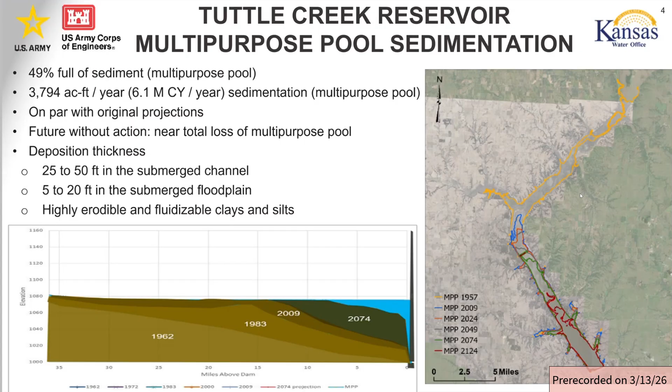And then you can also see a second way of displaying this, loss of the multi-purpose pool over the years, originally in 1957 when the reservoir was constructed. You can see the size of the multi-purpose pool at that time, and then just compare that over time to the different time frames where we either had a survey or we have projections. And then this red is what would be left of this total reservoir area multi-purpose pool, at least projected to be in 2124.

So to give a little bit of background on water injection dredging, or WID as it's known, it's an innovative type of dredging where the dredge injects large volumes of water at low pressure into the sediment bed in order to fluidize it. WID vessels are pretty simple compared to traditional dredges. They have two large pumps on the barge that pump the water from the surface down to the bed.

The dredge is positioned over an area to be dredged and then moves in one direction in order to fluidize the sediment. They don't typically require a lot of support equipment. They're easy to mobilize. They have low energy input compared to traditional dredges. And so WID has never been performed on a reservoir before.

So our WID vessel is unique compared to other vessels. A lot of WID operations occur in ports and harbors, primarily overseas. And so ours was constructed in the state of Kansas, and it was designed specifically for Tuttle Creek Lake.

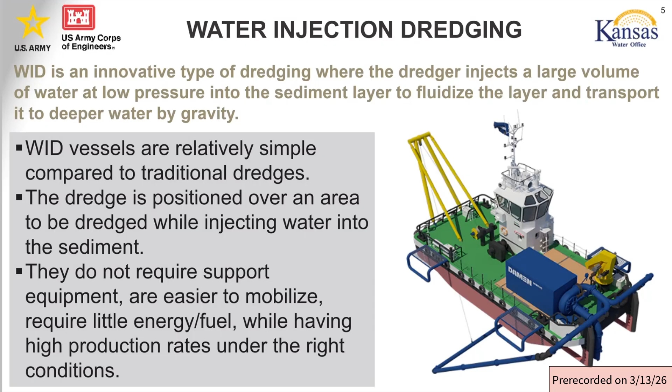So water injection dredging's goal is to create a density current. By pumping large volumes of water from the surface to the bed, it creates this density current, which is essentially a fluid mud layer that is denser than the surrounding water. And that density difference allows the density current to transport downslope, typically towards the gates. Once it reaches the gates, it would re-enter the natural environment of the Big Blue River.

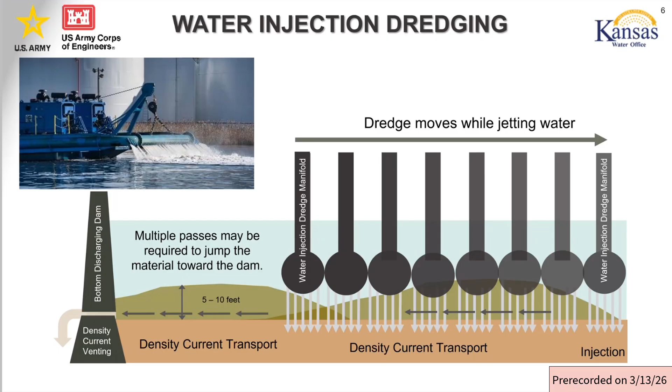As part of this project, we are trying to study the travel distance of this density current and other operational parameters so we can fine tune it and determine what the optimal dredging pattern could be.

So as we discussed in the past, the goal of this demonstration project is to answer questions, not to remove a certain amount of sediment. Again, because WID has never been performed on a reservoir, we need to answer these questions. Could it be an effective sediment management methodology in the future?

So here are some of the primary questions that we are trying to answer as part of this project. Really, how much sediment can WID remove? How much does it cost? And then what are the downstream impacts? Are there any downstream effects, both for water quality, ecologically, geomorphology? And if we can answer these questions, then we consider this a fully successful demonstration project.

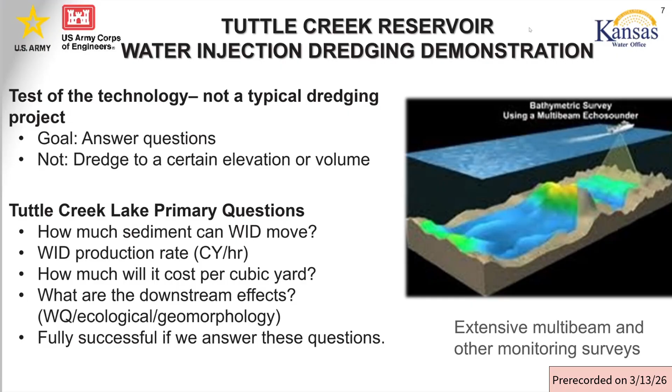In addition to the primary questions, there are also some secondary questions that we are working with several collaborators to answer. These secondary questions primarily relate to the sediment transport of the density current, some sediment consolidation, as well as some chemistry and ecological variables both in the lake and downstream as well.

Some of our collaborators include federal entities in the Engineer Research and Development Center, the USGS. We also have several state collaborators and several academic collaborators as well.

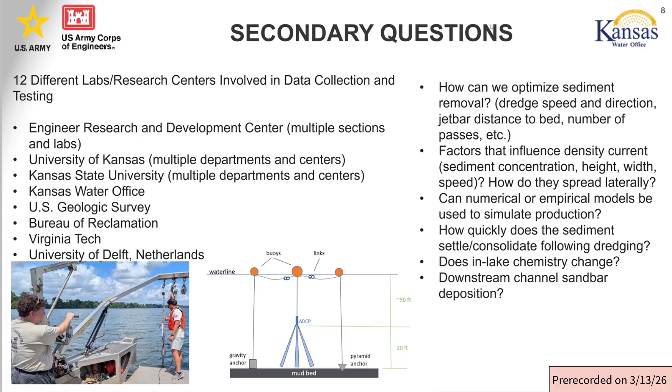Our implementation plan is to dredge, as Laura mentioned, for 200 hours in the fall, in the spring, and in the summer. The fall test occurred in September of 2025. As part of that, we really used it as a big science experiment to determine what the optimal dredge parameters should be. We tested parameters such as the dredge location, the speed, the direction, nozzle spacing, and we assessed the effects of all of these on the reservoir bed and also the water quality downstream.

And then from the lessons learned from the fall test, we are going to implement those lessons to the spring and the summer tests to optimize sediment removal while remaining within our permit restraints downstream.

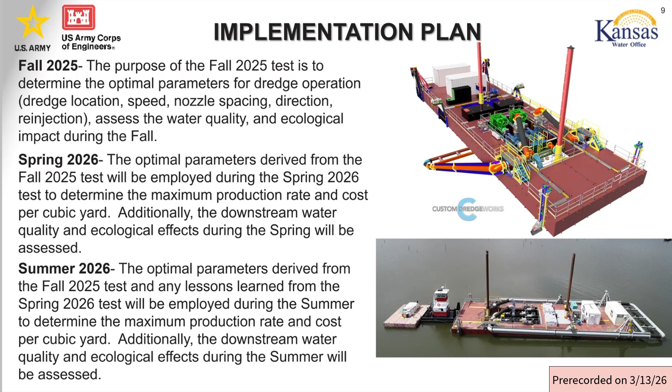The dredge operations will occur primarily closer to the dam, so within the first 4 miles from the dam will be the majority of the dredging. And then some of the further tests away may help answer some of the questions such as density current transport, what that transport distance should be. So we anticipate a little bit of dredging in the upper reservoir, but primarily focused in the lower 4 miles of the reservoir.

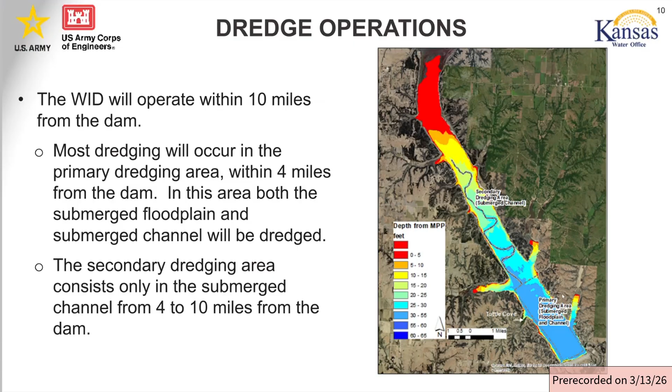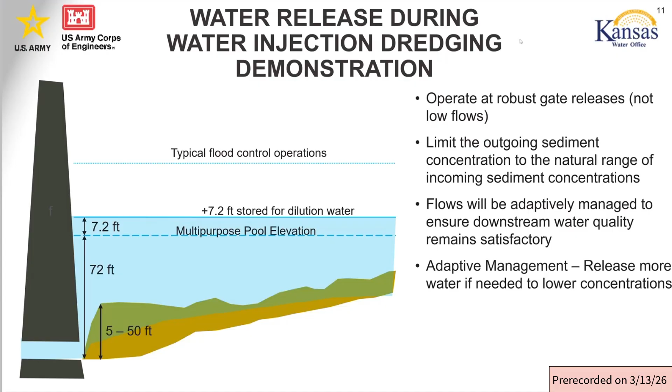The flows leaving the reservoir will be robust flows in order to ensure that the flows are able to transport the sediment that's leaving the dam. And those flows will be adaptively managed to ensure that we limit the concentration in the downstream channel to the natural variability of what's coming into the reservoir. So our main goal is really that we manage the flows such that what's leaving the reservoir is similar to what's coming in as far as concentrations go.

Here's our downstream monitoring plan. We have 5 continuous gauge stations on the Big Blue and Kansas River, measuring real-time turbidity and water quality. And we are also monitoring at several locations for pre- and post-project water and sediment quality measurements. Some of these include bed elevations, bed gradations, invertebrates, and water quality parameters.

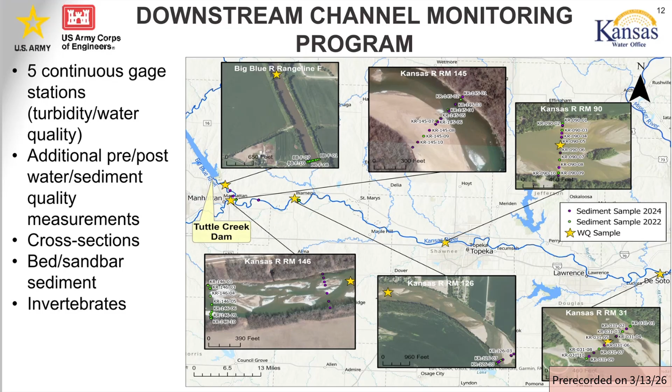As far as some of the preliminary conclusions that we've gleaned from the fall test, we did not exceed any of the state water quality criteria or the conditions of our 401 certification. Monitoring results for the fall test remain below the treatment triggers for Kansas River water plants, so no additional treatments were necessary. We are collaborating and planning for ongoing adaptive management technical teams to mitigate any potential impacts to aquatic life, so we are continuing to adaptively manage during the following demonstrations.

And then finally, the aquatic richness was lowest at the upstream control site 3 days and 4 weeks after the WID test. Downstream sites showed no apparent reduction in richness compared to the pre-test levels or to the control site.

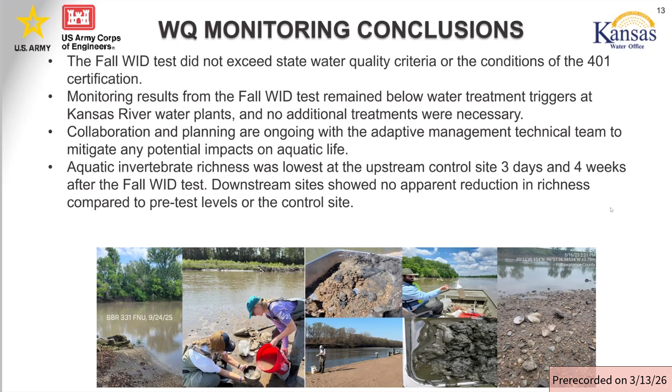Yeah, so I'm just going to provide a brief summary on the data assessment for all the information that we're collecting during these 3 dredging demonstration periods, and then how we're going to share that information internally and externally as well, and then our post-WID reporting. So one of the products from the demonstration will be a project technical report that'll focus on addressing each of those primary questions that Michael mentioned earlier and describing the technical aspects, operations, the sediment production, water quality, and then downstream impacts.

There'll be a number of appendices included with the project technical report, including information from the Corps of Engineers for data collection and analysis, and then data and technical reports from other researchers like USGS and K-State and other entities that are supporting us as well. There'll be a USACE water quality report, downstream sediment data report, and then the USGS report and K-State, and that's mostly the downstream monitoring for the ecological pieces downstream.

And then there'll be a number of journal technical articles by the Corps of Engineers and by other entities as well. Several journal articles will be co-authored by the U.S. Army Corps of Engineers documenting the sediment consolidation, density current transport, operational efficiencies of WID, and potentially some other topics as well. KU, K-State, the Engineer Research and Development Center, and Virginia Tech, we anticipate that there'll be some journal technical articles by those entities as well.